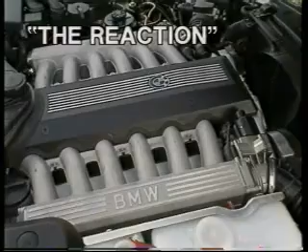It is fairly apparent that the BMW is the best car here by conventional judgment. It is the fastest, best handling, probably the best made and the most thoughtfully equipped. It employs the most modern construction methods, is probably the most crash-worthy and will be in production for the most years yet.

If there ever was a saloon of which its driver could be justifiably proud in any company, it's the Munich factory's 5-litre V12. In its sports mode, the car is breathtaking. This is a remarkable car in many ways.

Always totally safe and secure, the 730i remains utterly trustworthy. Even the dispassionate car buyer will surely be impressed by the high standard of the BMW's construction, by its well-planned cabin and high levels of refinement. Without doubt, it's a car you can admire right from the outset.

The BMW's angled dashboard is a further plus point. We've said it many times before, but it's still a standard setter, attractive and ergonomic. On its own, it's probably enough to sell the car to someone new to the marque.

High on prestige and style, the BMW is immaculately finished and refined, a car which is difficult to fault in any particular way. The BMW is a complete car, strong in all areas, handsome and desirable property in its own right.

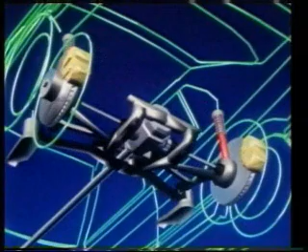Perhaps the largest single problem to overcome was to resolve the physical conflict between comfort and performance. The brief stated that the 7 Series had to exceed all previous limitations in both performance and comfort. Yet the very laws of physics seem to argue against anything other than a compromise. Fine handling in a car comes from an accurate positioning of its wheels, and the movement that a car's suspension generates distorts this positioning.

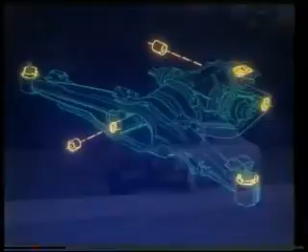However, the movement of the suspension is vital to comfort. The BMW solution to this lay in looking at the larger picture of the car. Although movement is generated by suspension, that's not the only cause. The actual body of a car flexes a surprising amount, generating geometric errors in cornering. Eliminate the body flexing, and enough gain would be made to allow flexible, comfortable suspension while improving the geometric accuracy of the wheels in cornering.

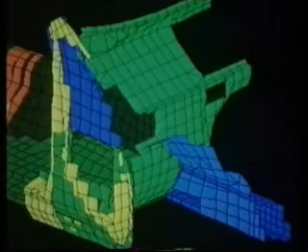To achieve this rigidity meant employing new body design principles. The front and rear windows are structural parts of the car, not simply clear viewing panels. The side of the car is pressed as a single piece. The result? A rigid body shell that allows fine handling while the suspension provides a comfortable ride.

As a further refinement, the designers produced a switchable suspension. This enables the driver to select the degree of emphasis between comfort and performance on any occasion.

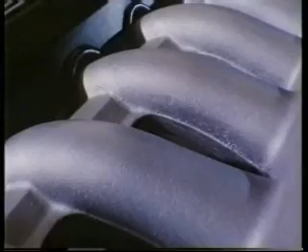With BMW engines already heralded as the reference standard for smoothness and power, the designers might have been forgiven for simply sticking with the engines already available. But the engines for the 7 Series were designed especially for the purpose.

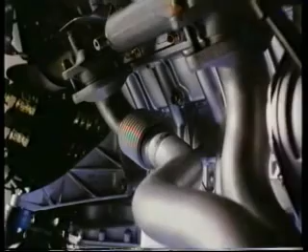The 6-cylinder, 3 and 3.5-litre units were based on previous BMW design principles, but used far more sophisticated engine management computers. These measure the engine load, engine speed, air temperature and pressure, engine temperature, road speed and inlet manifold pressure. They combine all this data to control the mixture and timing of the engine, adjusting the data for every single combustion in each cylinder.

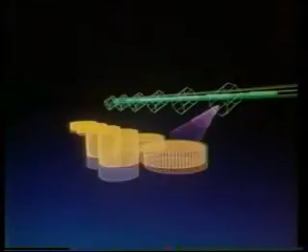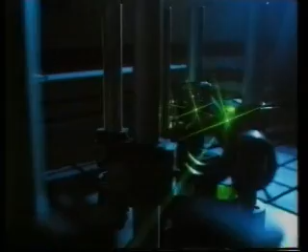The smoothness of the BMW engines comes from an obsession for fine tolerances that is without equal. The lathes that bore BMW's engines are set to such fine tolerances that they require a continual satellite link to a control computer at the manufacturer's headquarters.

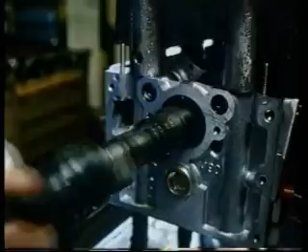Individual components, such as pistons and conrods, are individually weighed and made up into matched sets. Every single engine is test run on performance dynamometers to check power, smoothness and quietness.

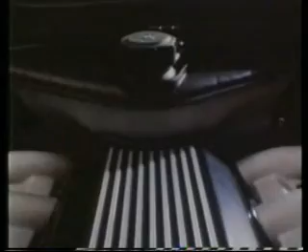And for those who find 6 cylinders and 210 horsepower insufficient, there is this: a V12 engine assembled by hand but controlled by computers. It generates a smooth and effortless 300 horsepower, powering the 750 to well over 150 miles an hour.

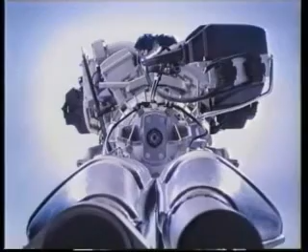The brief to create a car that is as satisfying to passengers as it is to drivers was taken with enthusiasm by the designers. Their concept of what luxury should mean is very much an individual approach to the subject, not based simply on acreage of wood and leather, but on interior design superbly suited to the needs of the driver and passenger.

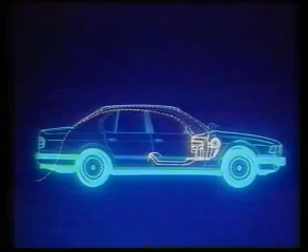Computers that can remember not just how driver and passenger enjoy their seat adjusted, but which also adjust mirrors and seat belts to suit. Ergonomic perfection forms an important part of comfort as well, with a careful balance of relaxed seating with proper orthopedic support.

For BMW, safety extends far beyond enabling the occupants of a car to survive an accident. The safest car is one which does not have the accident in the first place. Therefore, heavy emphasis is given to active safety, aspects that prevent accidents happening.

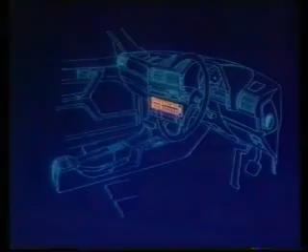This includes measures such as the fine interior ergonomics, which help a driver to control the car with a minimum of distraction, individual climate control, which enables a driver to stay fresh while the passengers rest, and such refinements as rear view mirrors that detect dazzle from cars behind and automatically dip the mirror to an anti-dazzle setting.

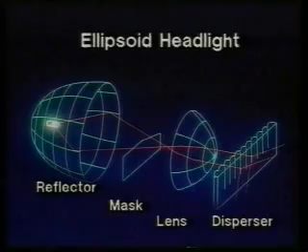It includes special super ellipsoidal headlamps which give better night vision, and advanced computer warning systems that monitor all the critical functions of the car and warn of any problem which might occur.

Naturally, ABS is standard, and ASC, the revolutionary anti-wheel spin system, is available. This prevents a car spinning its wheels on difficult road surfaces, further improving safety.

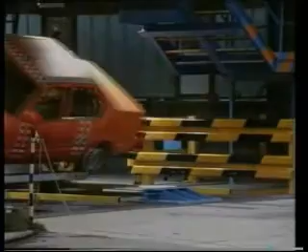Should an accident occur, then the 7 Series is designed to minimize the danger. The rigid body shell gives enormous protection to occupants by exceeding the most stringent safety standards in the world.

The front seat belts automatically adjust to suit the person wearing them, while the rear belts are designed to lock on the outside to prevent passengers being thrown together in an accident.

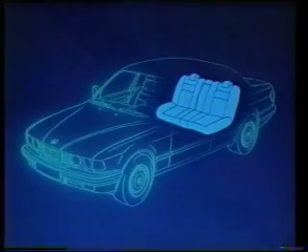The central locking system can detect an accident and will automatically unlock all the car doors after an accident has taken place to enable rescuers to gain quick access.

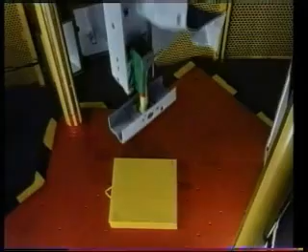And in a low-speed accident, up to 2.5 miles per hour, the 7 Series takes care of itself. Small impact-absorbing cassettes, which absorb the car's impact energy, are fitted to the front bumper of the car. These can be cheaply replaced and reduce the damage caused by impact in low-speed accidents.

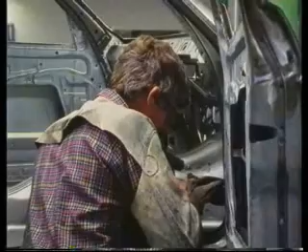How can quality require innovative thinking by a designer? The principle behind the quality of the new 7 Series was that quality should be designed in, not applied as a final top coat. So quality control inspectors and production line workers were seconded to each design team to ensure that the results of their work would be easy to manufacture and assemble with high quality.

This determination to ensure that the building process should be flawless led to the first 500 7 Series being built, then tested and torn apart again to see how quality measured up.

These cars were driven over 4 million miles in conditions from the Arctic to Death Valley to further develop details of quality. Such tests not only enable BMW to learn much about the car's performance, but also a great deal about its quality. The BMW 7 Series that is sold today differs from the test prototypes in over 10,000 ways, simply because 4 million miles of testing threw up over 10,000 tiny opportunities to perfect an already fine car.